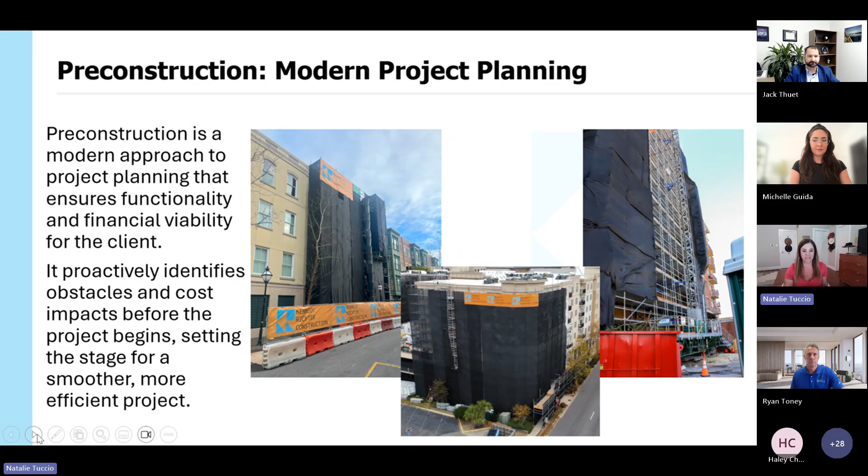So what is pre-construction? Pre-construction is a modern approach to planning a project that ensures it's going to be functional and financially viable for the HOA. It proactively identifies obstacles and cost impacts before the project starts. This is so important, and it really does set the stage for a smoother, more efficient project.

So what are you going to learn tonight? You're going to learn that this is a transparent planning process. Priority work within a budget is focused on. The goal is to reduce the risk of change orders. You're going to be left with a project that works for you and can be financially achievable.

All along the way, we're putting a plan into place to minimize resident and tenant impact. So when should we use pre-construction? Well, you've got a scope that's undefined. Maybe you've got a long list of deferred maintenance and you don't know where to start. Anytime you're seeking a loan or a special assessment to fund a project, it is so important to have it dialed in on all of the complex logistics and down to the penny.

And also if you have a large complex project or construction defect repair project. And so that's what we're talking about tonight, really complex projects that have a long list of scopes that need to be developed into a project that can be done. Now, it doesn't always make sense to use pre-construction.

If you've got a scope that's clearly defined and you know that if you put it out to 3 bidders, they're going to pretty much come back with the same thing, you don't need to spend all this time doing pre-construction. If you've got a single scope project like painting, concrete, or asphalt, it is fine to go out and just seek 3 bids. Or if you've got a project that's smaller in size, it probably doesn't make sense to spend all this time planning.

So it's not always applicable, but where it is and what we're talking about tonight are these large complex projects where we're going to have to seek some sort of funding option, or a construction defect repair project where we've got to stay within those settlement funds. So we're going to jump into a case study. Sunny Haven HOA, yes, we changed the name to protect the community. They had a lot going on.

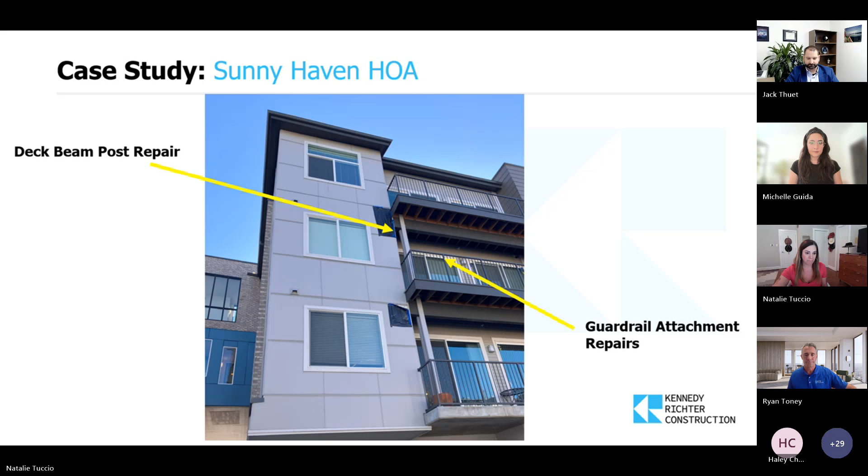Oh, sorry, I tried to click. It's my clicker. Sorry.

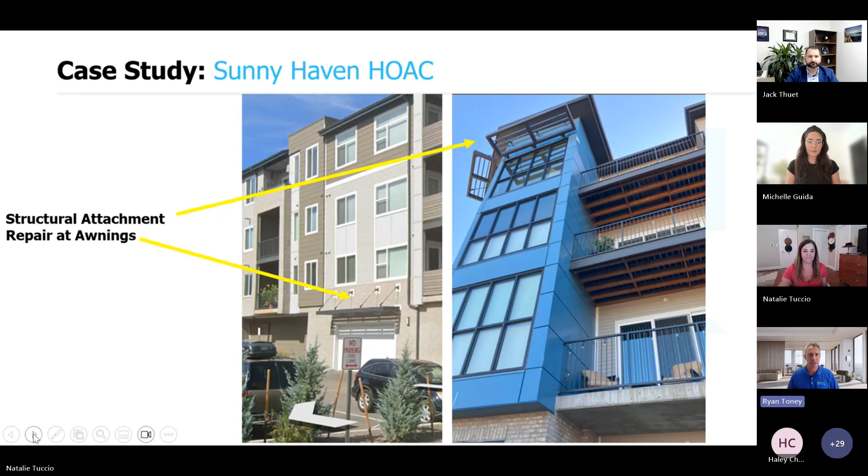Additionally, on the next slide, please, Natalie. A number of water-resistant barrier issues. So WRB, you're going to hear a lot of acronyms today, so if you have questions about that, just type it into the chat. But water-resistant barrier is the most common element, the last line of defense that building exteriors have before it actually hits exterior sheathing on a building or exterior structure behind that sheathing. So in these cases, we had a lot of reverse lap, so the integration was improper on the water-resistant barrier.

We also had a number of places where they used the wrong material. So compatibility between materials is a big issue, especially if you're in some of those warmer climates. On siding projects or projects that have exterior siding, we've seen some products start to melt behind the siding, so improper self-adhered membrane flashing. That would exhibit itself by what looks like tar coming out from behind the siding. But in this case, it was improperly lapped water-resistant barrier.

One of the other conditions we had on this project was that the clearance from hard surface to exterior cladding, it was all the way down tight to the concrete. Most of these products that are installed on buildings nowadays have a minimum clearance requirement, anywhere from 2 to 6 inches, depending upon what it's adjacent to. So in this case, we had the sheathing down tight to the concrete. We also had the stone down tight to the concrete.

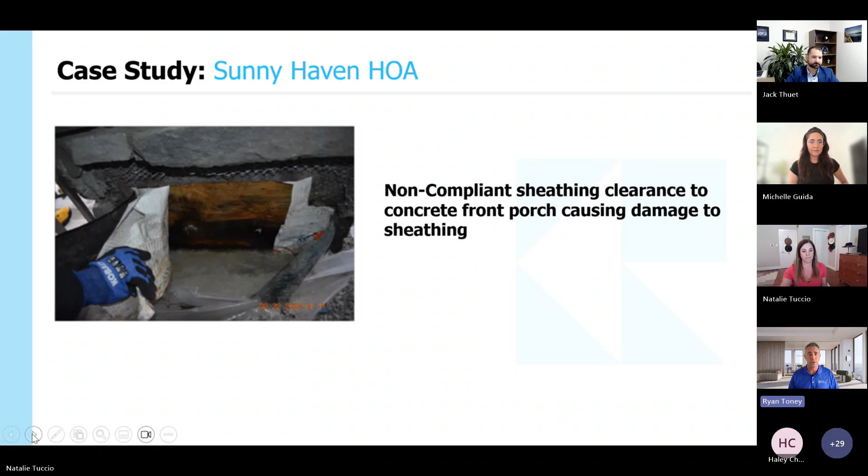And what that allows to happen is anytime we have snow buildup in Colorado, for those of you in southern markets, not really applicable, but we get snow buildup, and some of that exterior sheathing just wicks that water right up into it. In this particular picture, it's a post there. So enough water gets in there and it just starts to saturate that wood and that structure, and eventually really compromises the structure.

Diverter flashing: if you've got any low roofs on any of your projects or properties, you may notice some diverter flashing. This happens when we have a low roof situation and you have a perpendicular wall system. The water comes down adjacent to step flashing, but at the bottom of that step flashing, it should have a kick-out flashing. What we commonly see is the kick-out flashing is not installed properly, does not divert the water into the gutter, instead gets behind the water-resistant barrier and then really deteriorates the system, because in many cases this is a shaded location. So you're going to see faster deterioration at those northern exposure locations.

Some really easy to fix, but high risk items around this property were really trip and fall or slip and fall. We get a lot of ice buildup in Colorado. Anytime we've got water that's not immediately getting diverted off site, that's a risk for slip and fall. Trip and fall is easier.

We can grind some of that concrete, but they had a lot of settling in their concrete because the subgrade on the concrete was not properly prepared. So we're seeing some settlement in some areas, some heaving in other areas, which is not a good combination if the subgrade's not prepared properly. And that's where you're going to see some differential movement of concrete.

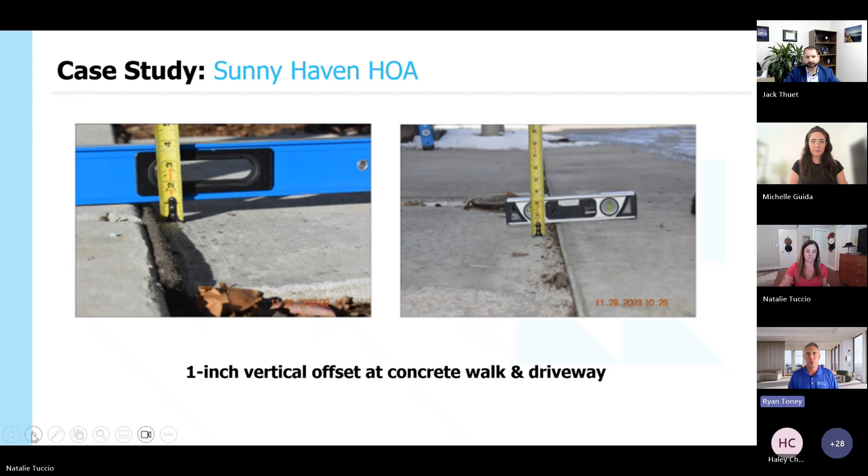And so for Sunny Haven, we looked at their concerns, we did a site assessment, we said, all right, it's going to take 112 days to plan your project. Pre-construction can take anywhere, depending on the size of the project, from 30 days up to 250 days. But for Sunny Haven, it was 112 days. We told them your anticipated start date for construction is July 24th. And actually, we ended up beating that and starting in June. But this really became the roadmap on how do we plan this project and start to wrap our heads around it.

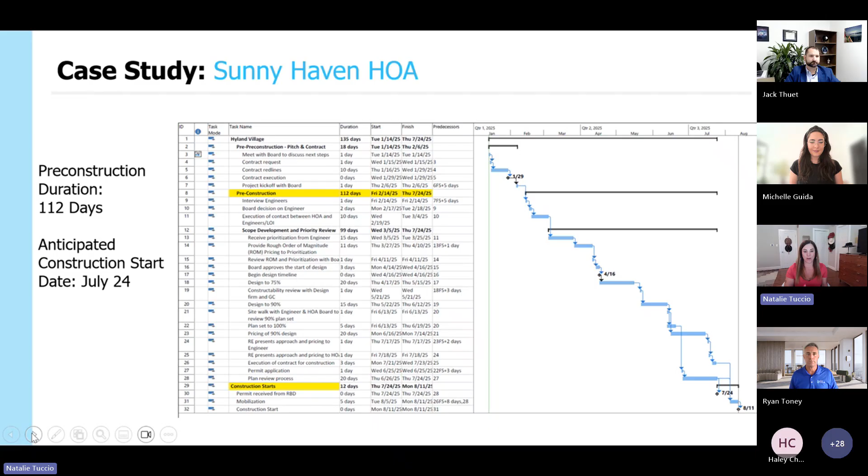The engineer is the person that designs the project's technical plans. They ensure the safety, the compliance, the functionality. So they're the ones putting together the specifications on what needs to be done and how it needs to be done. Now, the contractor in pre-construction works in collaboration with them to review their plans, develop cost estimates, schedules, constructability of what they're putting on paper. Can it actually be built? And then they also plan for the efficient and on-budget execution.

It's really important that they're collaborating along the way so that we don't have scope gap, we don't have scope creep, and that we're all working towards the common goal, which is creating a project that works for them and is going to be something they can afford. And so how do you hire your team?

Well, you would work with your community association manager at Worth Ross. You would write a request for qualifications, an RFQ. You issue it to 3 engineers and 3 general contractors. And you simply ask, what's your firm name? What's your approach to pre-construction, planning our project? What's your capacity? And who's your pre-construction team? And then what is your fee for pre-construction going to be? And we'll talk about fees a little later on.

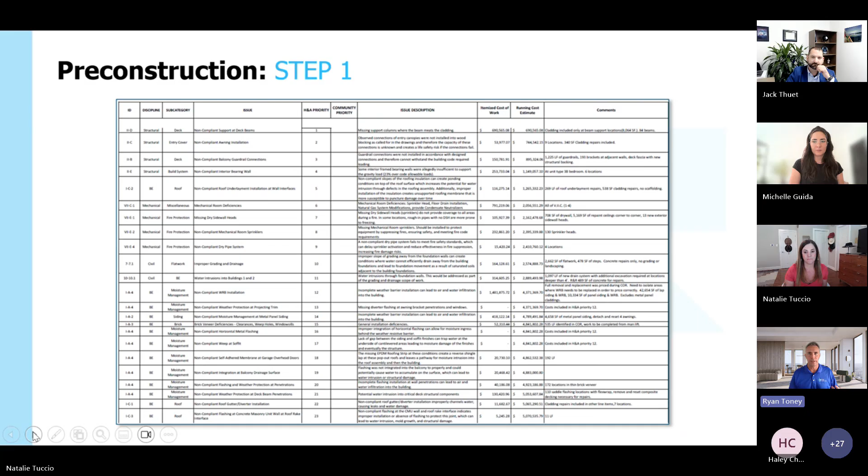So this document that's assembled is actually really good in protecting your clients because if we do have an engineer providing guidance on what priorities need to take place first, it will be the guiding document thereafter, and it will allow them to just determine what they're going to focus on. So prioritization is usually set up by what are life safety items, what's most critical in putting our clients at the greatest risk. So those are going to be the highest items and scopes that you're going to focus on.

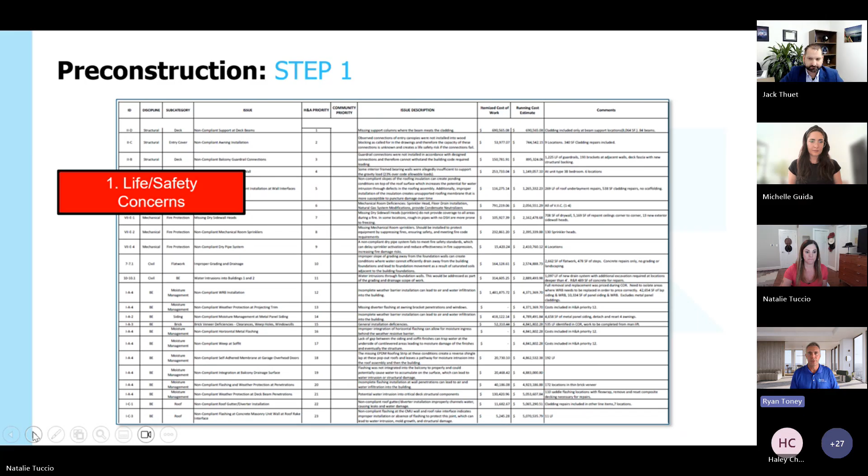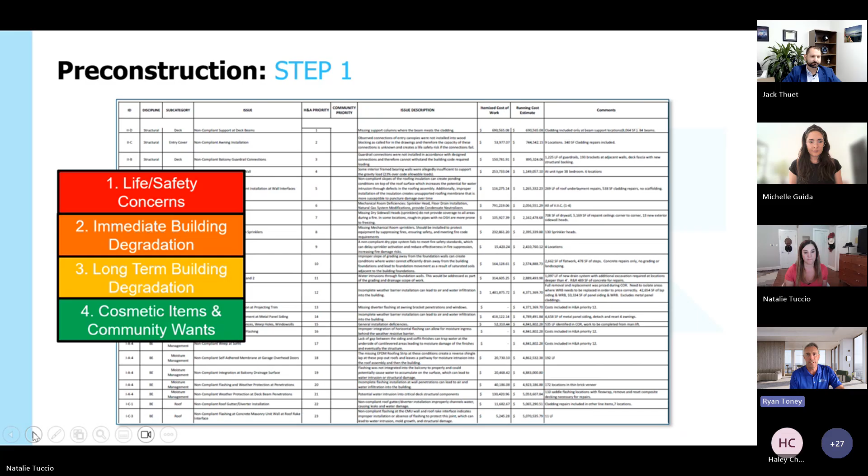The second is going to be immediate building degradation, followed by long-term building degradation. And then falling further down the list are kind of communities' wants. If they've got a sealant project, like paint or around windows and doors, they're looking to get done, they kind of fall further down. But in this order is what we really want to focus on: life safety first. So in the example that we had shown, obviously the guardrails and the awning attachments and the deck beams, those needed to be prioritized first.

So we go through, we list all of these scopes that were either discovered during site walks, during litigation, however the project came across our plate or your contractor's plate. We give each one a ranking, and those can actually be done by the engineer, which is what we want. We also, a lot of times, will add a community priority. So it allows the client to have better input on what they see as their greatest priorities. And they may not be thinking about it in the same fashion that an engineer would, but it is important to have their input.

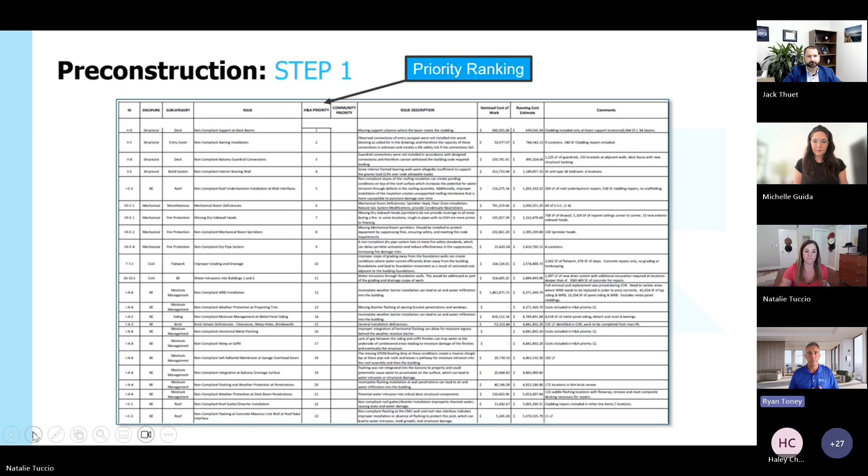From there, from the ranking, we move over to the rough order magnitude pricing, which is a single line item cost for each one of these scopes. And then following that, it compounds by the running total.

And this allows the client to see exactly how much scope they can get captured within their budget. A lot of times we'll encourage clients to design beyond that because on some projects, and we try to do this for every project, we're going to try to find value engineering options. And that's kind of one of the beauties of pre-construction: you're working with an engineer, you're working with a contractor, and working together, they can try to find cheaper options to achieve the exact same design intent or original intent.

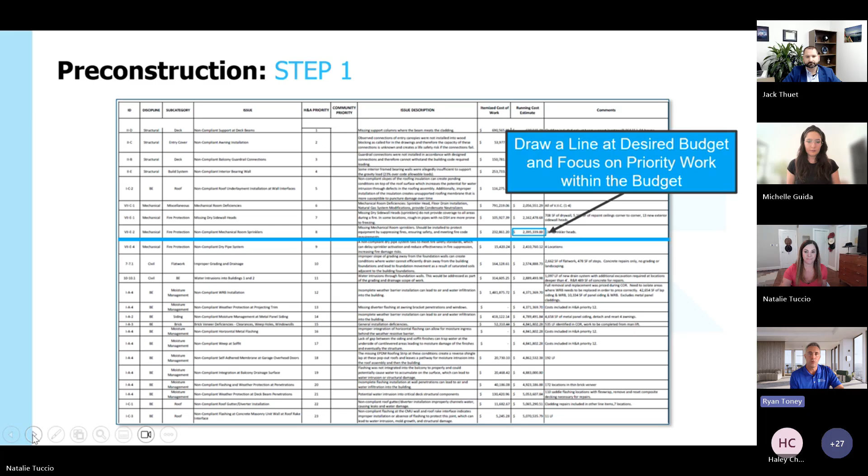All right. My clicker is so funny. So now you know there's a bonus question. If you didn't see that, now you know. Get ready to type it into the chat again. What is considered top priority on a prioritization matrix?

Oh, they were ready. Darnell came in first right away. Okay. Are we getting multiple answers? I can't see the chat. Yes, we are. Yay! Participation. All right. Gold star to everybody, but Amazon gift card to Darnell. Thank you. Anything to life safety. That was so fast too. That was awesome. I like it. Yeah, that's great.

All right. So from there, the next step after we've hired our team, we've prioritized the repairs and set the budget, the next step is to value analyze the repairs, as Ryan was saying. And so we look at all of the repairs that need to take place, and then we really get surgical on it. And we say, all right, we know we need to repair this. Is there a more cost-effective way that would still yield a high-quality repair result? And if so, how can we do that? What dollars are we saving? And also, can we get more work done if we're saving dollars over here? And so with Sunny Haven, Ryan's going to talk to you about what the initial repair scope was and how he value analyzed it to cut costs by almost 50%.

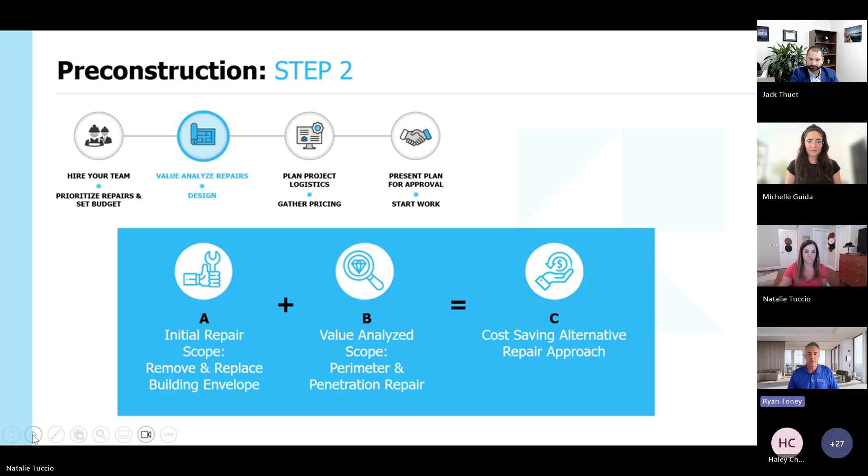Yeah, so thanks, Nat. One of the common terms that you hear in construction is P&P, which is perimeter and penetration, or R&R, remove and replace. So in this particular scenario, Sunny Haven had a full removal and replacement called out to be done for all the siding and the stone. Unfortunately, they don't have the budget for that.

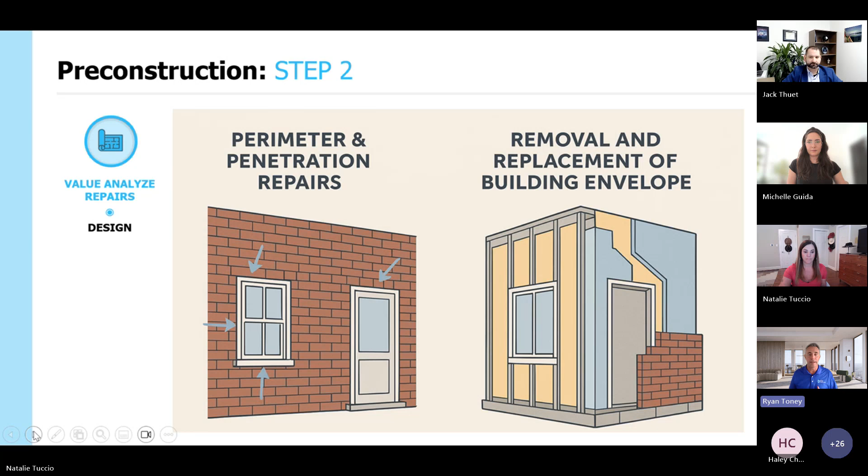So in order for us to try to achieve the exact same intent on the design, we went with a perimeter and penetration approach, which means we're pulling back the areas immediately around the fenestrations, which is your windows and your doors, readjusting that flashing, making sure that the integration of the behind the wall flashing is proper in shingle lap fashion, so we can make sure that water stays out of the wall system. So again, instead of removing all of the brick, we're only doing immediately around those doors and windows to make sure that the flashing is installed properly. So it's a massive cost savings to the client while achieving the exact same design intent.

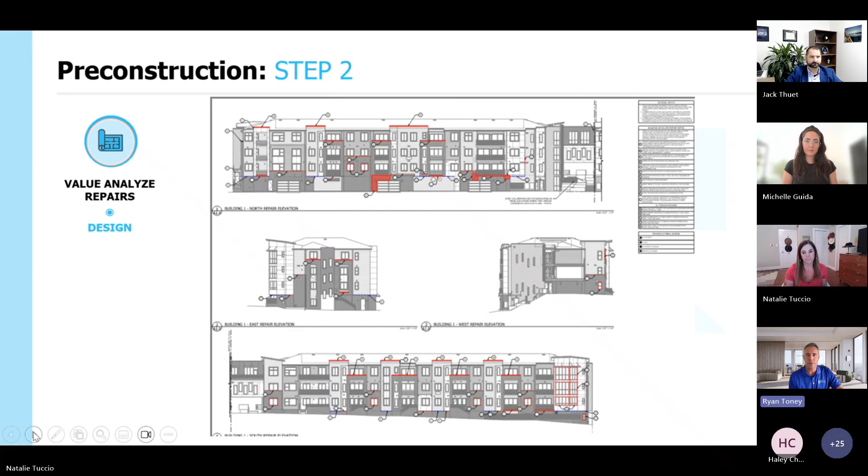Okay, so... oh, go ahead, Nat. No, you go ahead. Sorry.

So all the while we're working with an engineer, or your contractor's working with your engineer, as the engineer is in design, the contractor's working through all the logistics. So many of these are going to have cost impacts. How we're going to manage safety, how we're going to manage quality, how we're going to move through the project in an efficient manner while minimizing footprint, and how are we going to communicate? And each client is different. We've got some that are going to be, we really only want you to post notifications at the elevator.

Some are going to be, we want you on a weekly call presenting to the entire community. It's just different with everybody, and each project is different from each one of these 4 categories when we're planning logistics. So when we're talking about safety, it's not only the safety of the residents, it's the safety of the workers as well. We need to make sure that we're delineating our workspace from pedestrian traffic, vehicular traffic. So we're going to do that. Your contractor should do that in a number of ways.

PPE, personal protective equipment, vesting, making sure that anybody who is management on site or can communicate with residents or clients is clearly identified. Our site utilization plan, so we can visually show clients exactly where we're going to be staging material, where they can expect to either lose some area of parking or some grass area where we can store material on site.

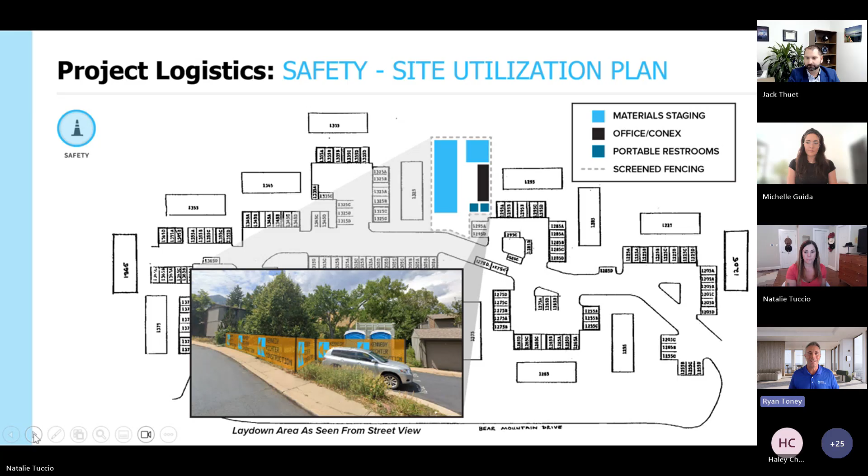This area is completely fenced off. In this scenario, we had to replace all of the sod because we knew we were going to have a lot of equipment coming in and out of that area. And so we shut the sprinklers off. We had a budget set up for sod replacement before demobilization. So it was a really good area for us to utilize. Unfortunately, it did take a little bit of pet area away from the community, but it was an agreeable plan by the time we were done with it.

Okay, moving on to quality. A couple different ways to manage quality. For us, we find that this is most successful. Obviously, on-site supervision, it's a multitude of individuals that are our contractor, KRC's representatives, but if you're using another contractor, they should have, on a major project, at least a few guys on site all the time to manage their quality, because a lot of times that's the reason that your contractor's there in the first place. Somebody didn't manage quality properly the first time.